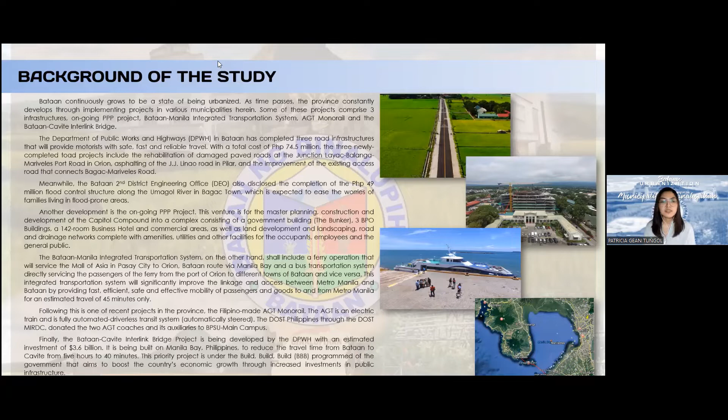For the municipality background, Dinalupihan is a landlocked municipality located in Bataan's coastal province. According to legend, even when Dinalupihan was still a barrio of Hermosa, its residents displayed a fighting spirit that helped them develop their community and defend themselves against alien invaders and local criminals. The area became known as Dinalupigan, or not conquered, because of its fierce fighting spirit. The name Dinalupigan stuck, but by chance, the letter G was mistakenly altered to H during the registration process. Dinalupihan is the name given to the town with a fighting spirit.

Its geographic location is at the northern tip of the Bataan Peninsula, 21 kilometers from Balanga, which is the capital town. It is bounded on the north by Florida Blanca, Pampanga, on the east by Lubao, Pampanga, on the south by Hermosa, Bataan, and on the west by Olongapo City. It is 36 kilometers away from the regional center, San Fernando, Pampanga.

For its households and population, the total number of households is 23,167, and the total population is 106,371, according to the 2015 census of population. This population is distributed across 9,723 hectares of land, resulting in a population density of approximately 11 persons per hectare. 4.59 persons is also the average household size.

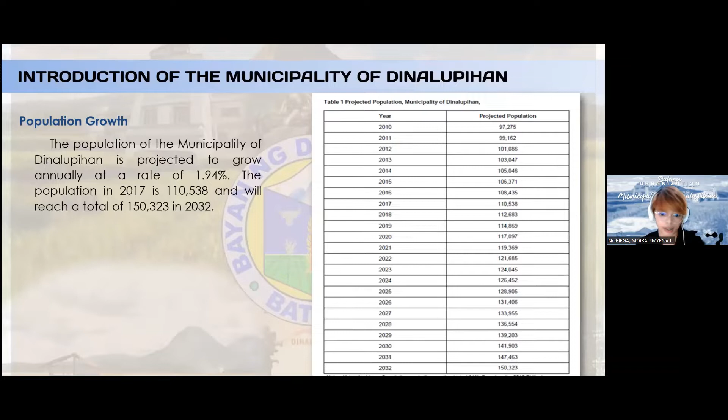The municipality's population is projected to grow annually at a rate of 1.94%, as seen in the table on the right. Population in 2017 is 110,538 and will reach a total of 150,323 in 2032.

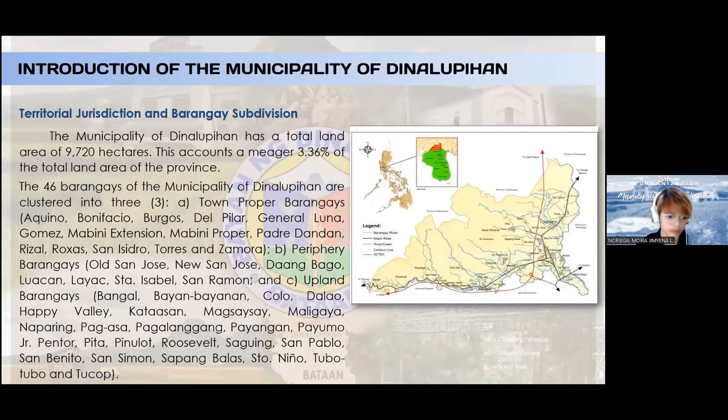For its territorial jurisdiction and barangay subdivision, the municipality of Dinalupihan's total land area is 9,720 hectares, which accounts for 3.36% of the total land area of the province. It also has 46 barangays.

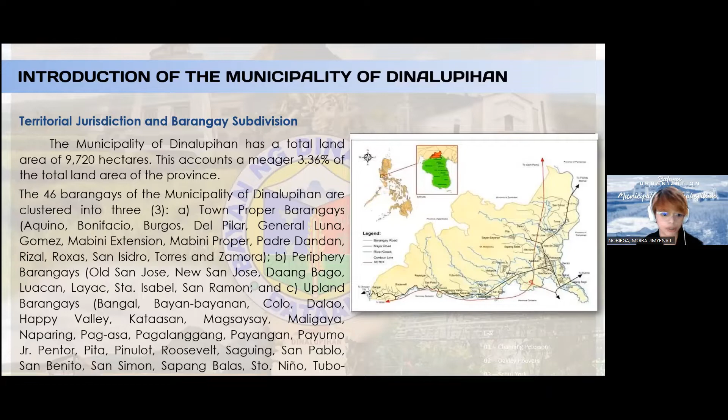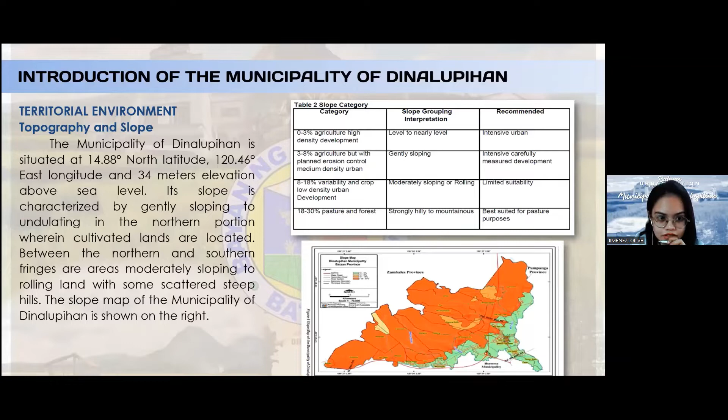For utilities and amenities, Digitel and Bayantel are the major telephone companies servicing the town, while Radio Communications Philippines Incorporated provides telegram and telegraph services. Penelco delivers the electricity, and the Dinalupihan Water District distributes water. Other areas use free-flowing pumps and deep wells. There are 8 banks, 7 schools, 3 hospitals or health facilities, and 4 recreational facilities and a public market in the municipality.

For its major industries, Dinalupihan specializes in the production of sawali and torch, as well as food processing and the creation of tinapa or smoked fish.

Palay, sugarcane, corn, root crops, legumes, and fruits are among the town's agricultural products. Animal husbandry, as well as poultry and animals, is also a major source of income for the residents.

As for its investment opportunities, Dinalupihan, which is emerging as one of the region's potential investment havens, is best suited for agri-industrial enterprises due to its strategic position and abundant agricultural product.

To present the environmental issues in the community, I call on Ms. Denise Lapid.

Environmental issue in the community. There are 11 listed environmental issues in the municipality of Dinalupihan.

First, the presence of hazards, which includes river posing danger during rainy days, occurrence of flooding, susceptibility of the agricultural sector to hazard, presence of residential dwelling along rivers and creeks, as well as private land and over extraction of groundwater.

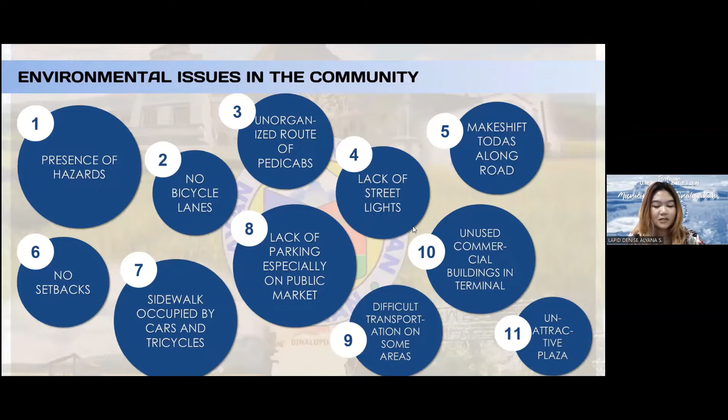To start the proposal, I call on Ms. Patricia Tuñgol. Our proposal on the concept structure plan of the municipality of Dinalupihan is based on its CLUP.

A concept structure plan is an indicative map showing the location and distribution of land uses, existing and new, including designated growth within the boundaries of the planning area.

From the two options, option 2, the dispersed concentration urban form, is the most favored by community stakeholders. It relies on Dinalupihan's inherent assets and encourages expansion into underdeveloped parts of the municipality that are either free of constraints or have a low to moderate risk of flooding and landslides.

The planned urban design best creates the circumstances for achieving Dinalupihan's long-term development vision. This is similar to the roadmap study of sustainable urban development in Metro Cebu.

Red areas are dedicated for work growth centers, blue areas are for play growth centers, and green areas are for green buffer tourism.

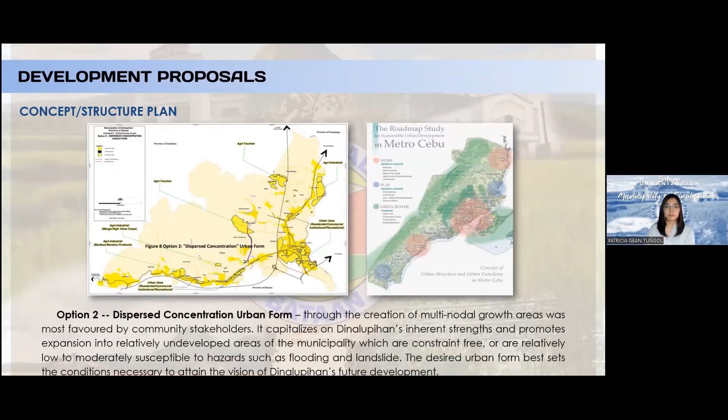Next, our proposal is the road design, which the survey respondents desire to improve. There are 15 elements of road design that we're proposing.

First is the welcome arch. From residents, only barangays have their welcome arch, but not the total community. A welcome arch plays an important role, for it aids people to distinguish the place and gives a welcoming ambience to the public.

The pictures below can be referenced for the proposed welcome arch. Next on the list are the bulb outs. According to Curb Extensions 2019, a curb extension is a traffic calming measure primarily used to extend the sidewalk, reducing the crossing distance and allowing pedestrians about to cross and approaching vehicle drivers to see each other when vehicles parked in the parking lane would otherwise block visibility. Its ideal location is at the corners and mid-block.

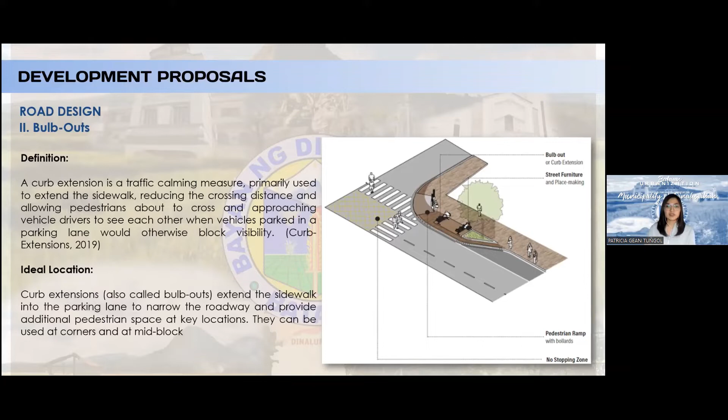Third element is designated parking area. From the survey results, it is revealed that parking is the topmost concern by the respondents. Some vehicles just park in undesignated places because of lack of parking. With this, the road can be designed such that there are spaces for parking.

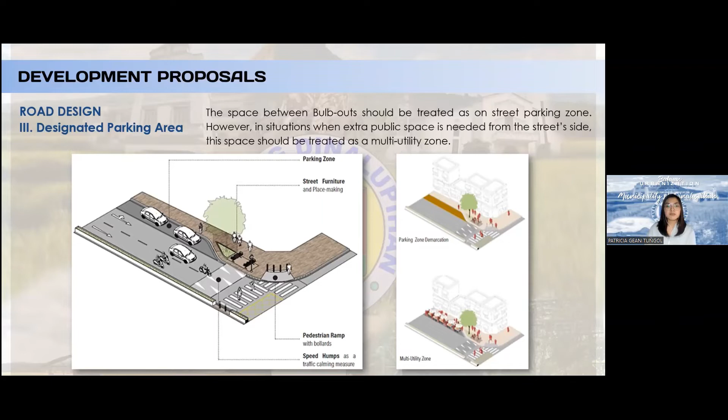The space between bulb-outs should be treated as an on-street parking zone. However, in situations when extra public space is needed from the street side, this space should be treated as a multi-utility zone. Here shows the detail of on-street parking for two-wheelers and four-wheelers, as well as a reference photo.

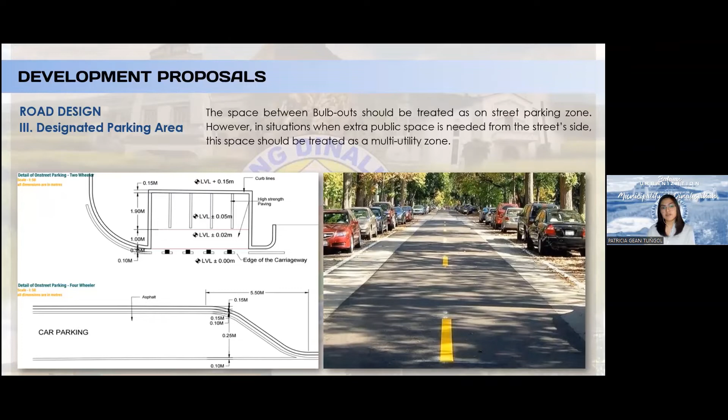Next is the bus stop environment. It constitutes access for the public from the bus shelter to the bus, and the necessary infrastructure required to facilitate the same. There should be a 3.5-meter wide footpath space to be maintained at all bus shelter areas, whereas a 1.8-meter clear unobstructed walking space shall be provided behind the bus stop.

In case the footpath width is insufficient, a simple pole and signage type of bus stop infrastructure can be used. Additionally, the holding area for the bus stop shall be 15 meters and placed on the curbside lane.

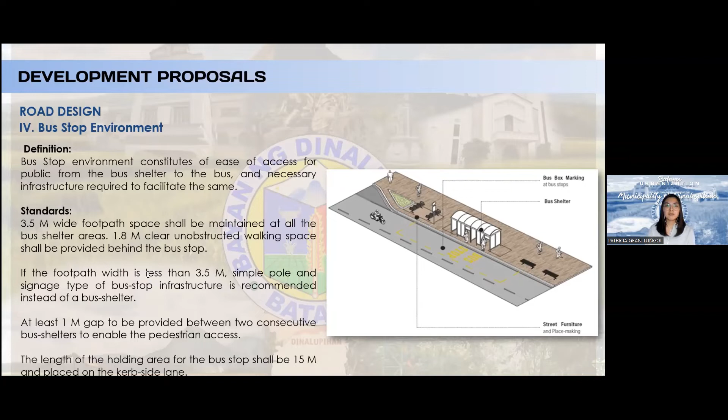Here are some photos to visualize this proposal.

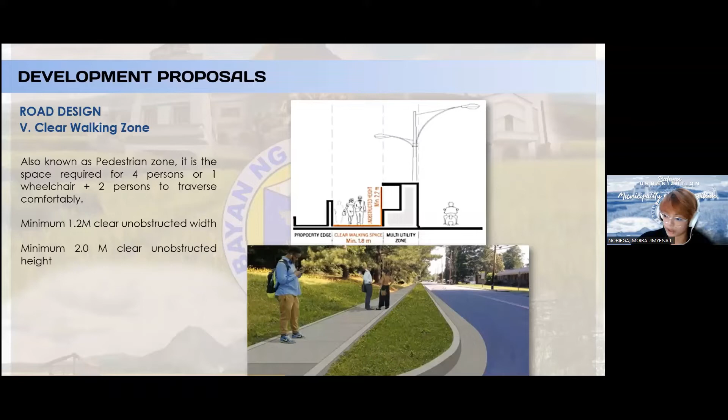The fifth element is the clear walking zone. As mentioned in the problems earlier, sidewalks are being occupied by vehicles which are not supposed to. For this reason, the pedestrian zone or sidewalk must have a space for 4 persons or 1 wheelchair plus 2 persons to traverse comfortably. The National Building Code requires a 1.2 to 1.8 meter clear unobstructed width with a minimum of 2 meter clear height.

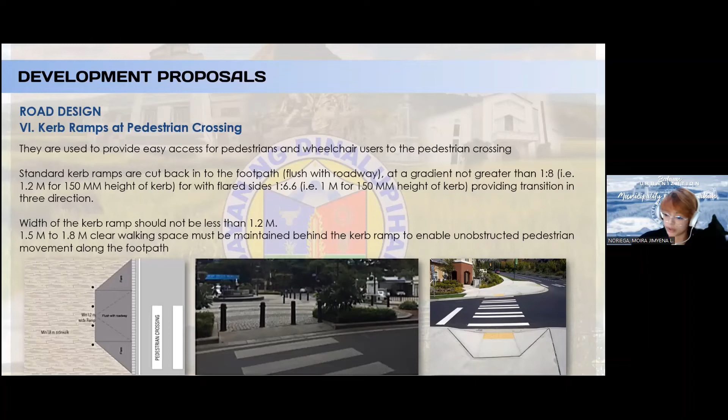Curb ramps at pedestrian crossings are used to ease access for pedestrians and wheelchair users to the pedestrian crossing. This must be observed to ensure that even persons with disabilities can access it. The width of the curb ramps should not be less than 1.2 meters. Here shows the detail of curb ramps which can be adopted by the LGU.

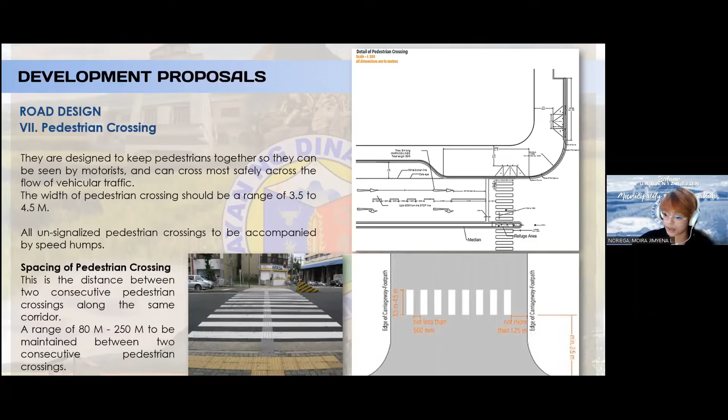Next is the pedestrian crossing. They are designed to keep pedestrians together so they can be seen by motorists and can cross most safely across the flow of vehicular traffic. Within the range of 3.5 to 4.5 meters shall be its width. The spacing between two pedestrian crossings must be within the range of 80 meters to 250 meters. Tactile blocks for PWD shall also be applied.

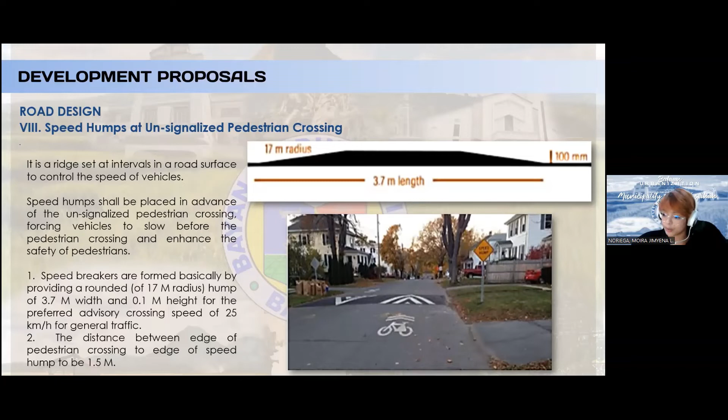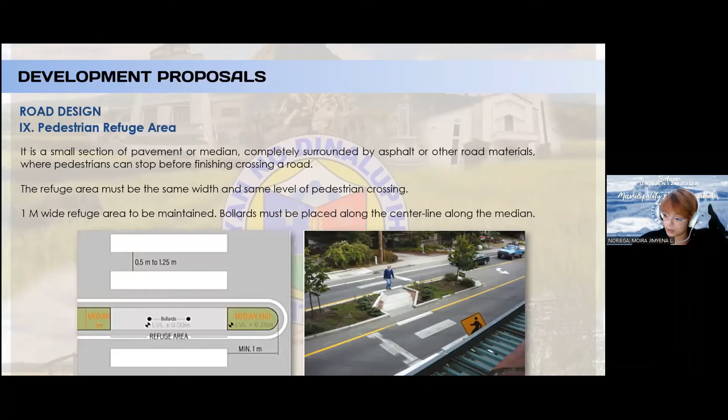Next is the pedestrian refuge area. It is a small section of pavement or median where pedestrians can stop before finishing crossing a road. 1 meter width shall be allocated for this to be maintained. Roads are not only for vehicles but also for pedestrians, that is why space or area for them shall be employed.

The 10th element is the median width. It refers to the width of the portion of divided road separating the travel lanes for traffic in opposite directions. This is important to divide lanes and avoid overtaking on prohibited areas.

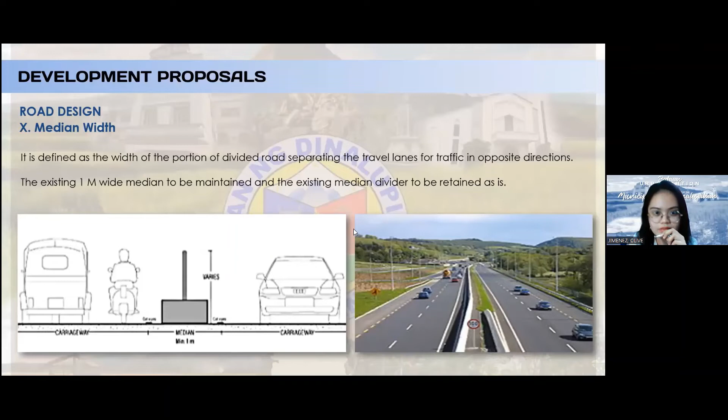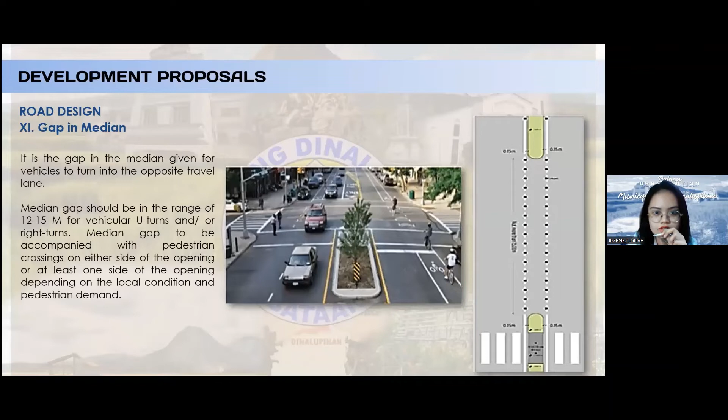Next is the gap in median. It is given for vehicles to turn into the opposite travel lane. It should be in the range of 12 to 15 meters for vehicular U-turns and/or right turns. This element also reduces traffic.

The 12th element is the pedestrian guardrails. To avoid vehicles occupying the sidewalk, this must be added to prevent indiscriminate crossing and spilling over of pedestrians onto the carriageway. It shall be placed on junctions, bus stops, schools, accident-prone areas, and other high-volume generating areas. A minimum of 6 meters length is also recommended.

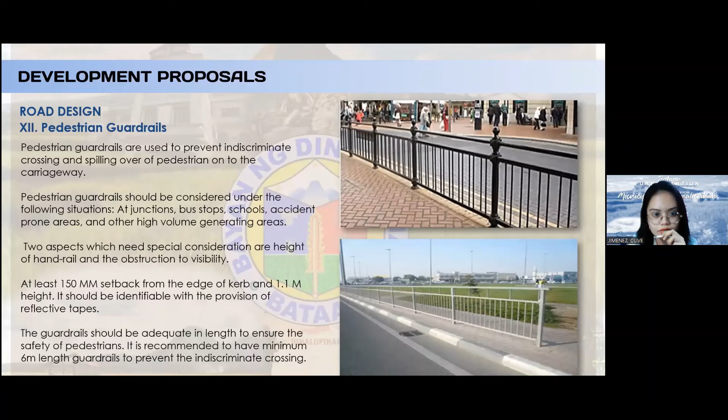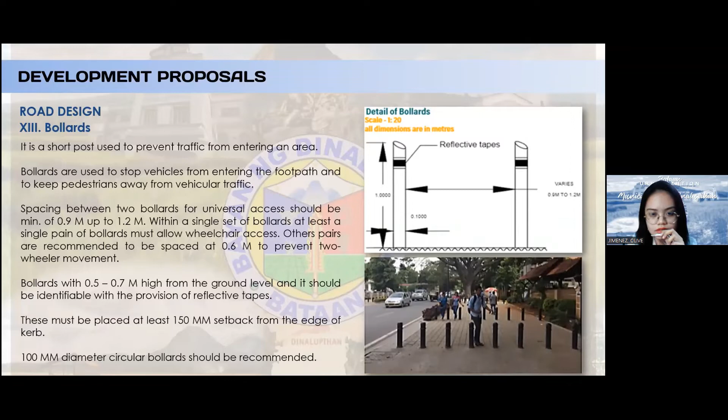Next are the bollards. Bollards are short posts used to prevent traffic from entering an area, stop vehicles from entering the footpath, and to keep pedestrians away from vehicular traffic. 100 millimeter diameter circular bollards should be recommended and placed at least 150 millimeters from the edge of the curb.

Street lights are also demanded by the survey respondents because some areas in Dinalupihan lack these. Street lights help in illuminating the area and provide safety and security to the people, objects, and places that are dark, especially in urban areas. These shall be installed all throughout the roads, especially on highways.

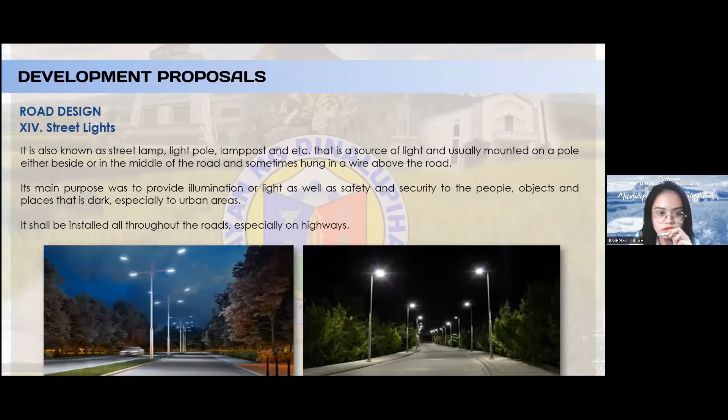The last element is the signages. This helps in identifying proper areas and rules on the road. While there are existing signages on the road, areas where there are no signages such as this are highly recommended to have one. First is the stop sign.

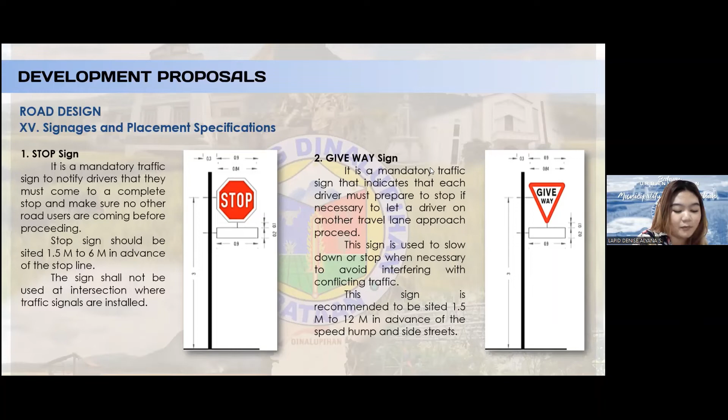That should be sited 1.5 meters to 6 meters in advance to the stop line. This shall not be used at intersections where traffic signals are installed. Second is the give way sign to be sited 1.5 meters to 12 meters in advance of speed humps and side streets.

Third is the no parking sign. It should be erected within 25 meters of the start and the end of prohibition and at the place where parking is truly not allowed.

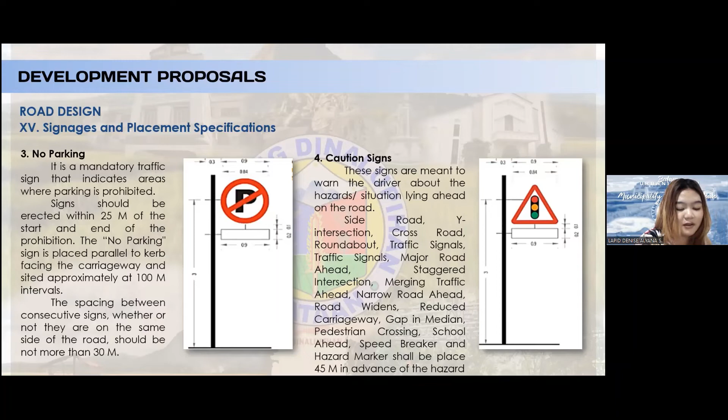Fourth is the caution sign that shall be placed 45 meters in advance of the hazard.

Fifth is the hump ahead sign that should be located 40 meters in advance of the center of the speed breaker.

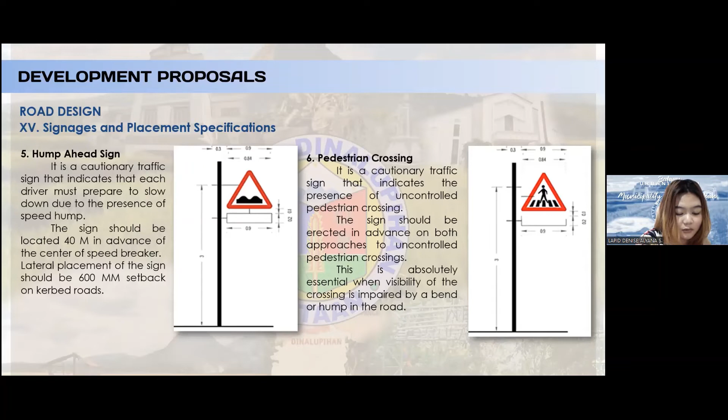Sixth is the pedestrian crossing sign that should be erected in advance on both approaches to an uncontrolled pedestrian crossing. Seventh is the parking sign that should be set up parallel to the axis of the road ahead of the place where parking is authorized.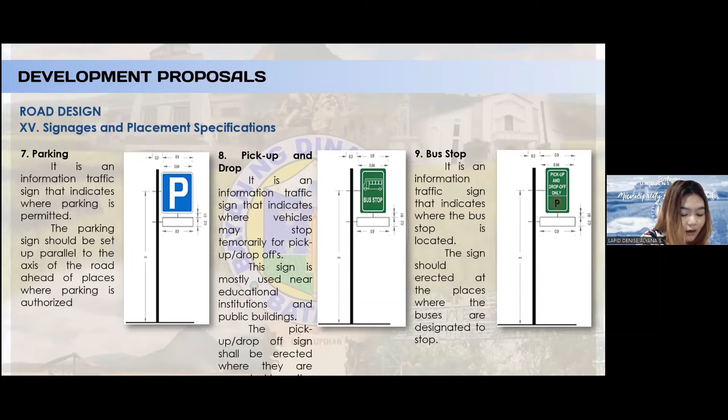Eighth is the pick up and drop sign that should be erected where pedestrians are expected to wait, most used near educational institutions and public buildings. Lastly is the bus stop sign that should be erected at the place where buses are designated to stop.

For the overall redevelopment of General Road, their illustrations are shown below. Combining the aforementioned elements, the general layout of the proposed road is here presented.

From the left, there should be a space to invite street activities such as small kiosks. Seating is also recommended for pedestrians with a lane of trees as buffer. Next to it is the bicycle lane to add more safety and guidance to the public. Energy-efficient lighting and signals must also be added.

After the designated parking area is the carriageway and bus lane. A waiting area or bus stop shelter is then placed next to it. There must also be a connection for walking networks as well as inclusion of wayfinding structures.

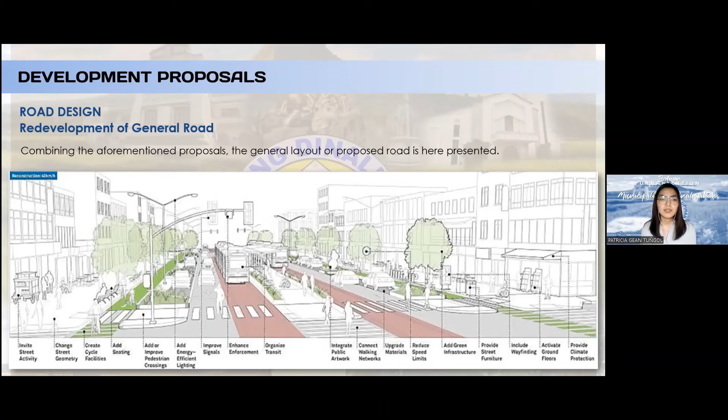The third proposal is the redevelopment of open spaces such as the plaza and food court. As suggested by the respondents, Dinalupihan's plaza should be redeveloped to add more life. This can be greener by adding more trees and plants, more legible by providing the municipality's name, and more relaxing

by inserting pergolas. The first two photos show the Aurora Park in Laoag, Ilocos Norte, Philippines. It is an open plaza similar to that of Dinalupihan's. The ground is finished with permeable pavings rather than concrete all throughout. There are also small gazebos and a fountain as a blue element. This park can be used as a reference for the plaza's renovation.

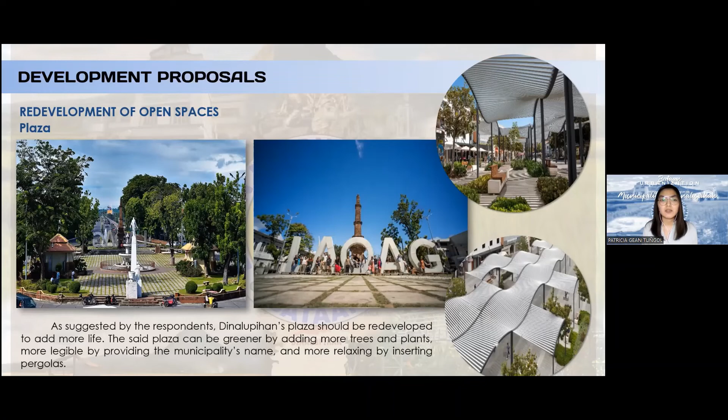Next is the development of the food court. The food court of Dinalupihan is underdeveloped, as said. The allocated space for it can be developed again to further maximize it, helping small business owners and adding revenue to the municipality. It can also encourage people to have quality time with their loved ones and friends by bonding and eating together. These photos are provided to visualize the proposal.

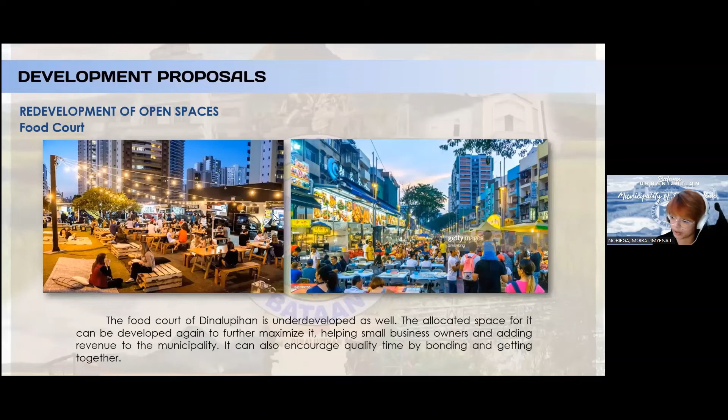Terminals also need development. For the common terminal, Parañaque Integrated Terminal Exchange can be used as reference. It has unique amenities and offerings such as pay lounges with shower rooms for passengers needing to freshen up after a long travel, a comfortable breastfeeding area for mothers, a multi-faith meditation room for all, a gender-neutral bathroom, and leasable spaces.

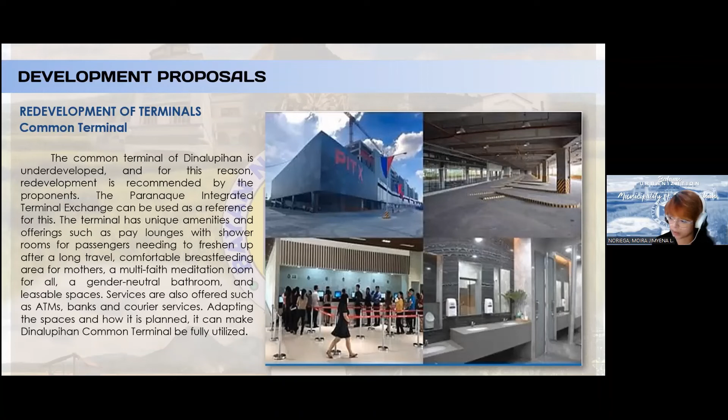Services are also offered, such as ATMs, banks, and courier services, adapting the spaces and how it is planned. It can make Dinalupihan Common Terminal fully utilized.

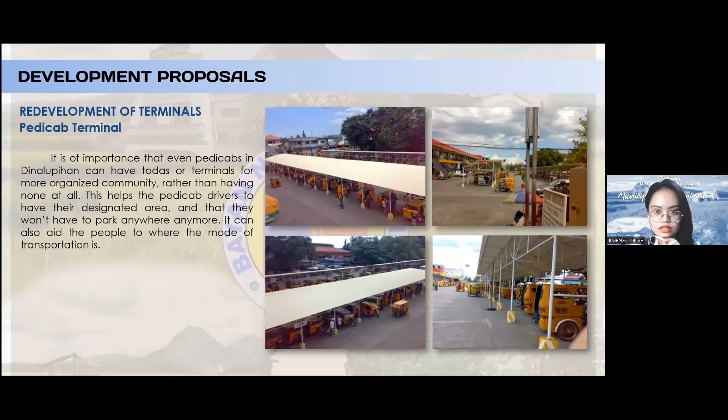Pedicab terminals are recommended to be built as well in order to be more organized. This proposal helps the pedicab drivers have their designated area so they won't have to park anywhere anymore. It can also aid people in finding where the mode of transportation is. It shall be constructed at proper locations so as not to block the carriageway.

To come up with a common ground for Bataan's municipal hall design, it is proposed that Dinalupihan's municipal hall exterior design be renovated to complement that of other municipalities. Moreover, a welcoming ambience can be reflected, and the dignity of the government can best be portrayed through this solution.

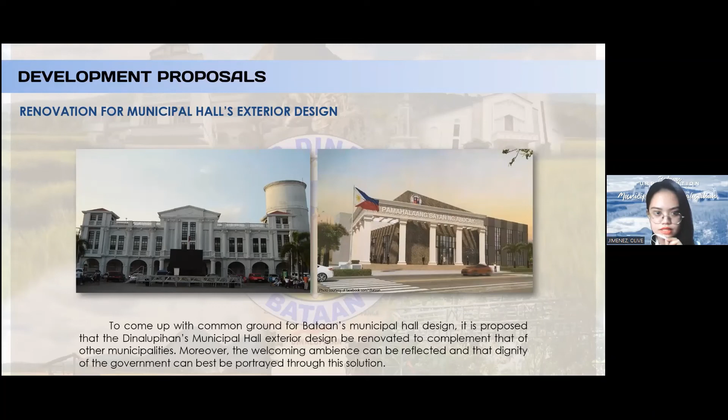Another proposal of our group is the community garden. It can be created on private or public land where citizens can grow fruits, herbs, flowers, and mainly vegetables. This can benefit them by spending less on their food and resorting to

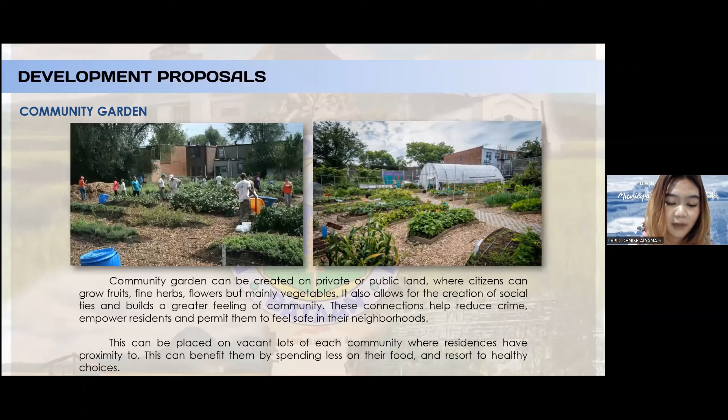healthy choices. Social ties and belongingness can be generated, and this helps in reducing crime, empowering residents, and allowing them to feel safe in their neighborhood.

To address overflowing water in rivers, protective barriers are proposed as well. River embankment defenses are regularly upheld by artificial revetments. Several cost-effective geosynthetic options exist that frame riverbanks, curtail erosion, and protect riverside and adjacent structures from the destructive flow velocity apparent in rivers during storms and floods.

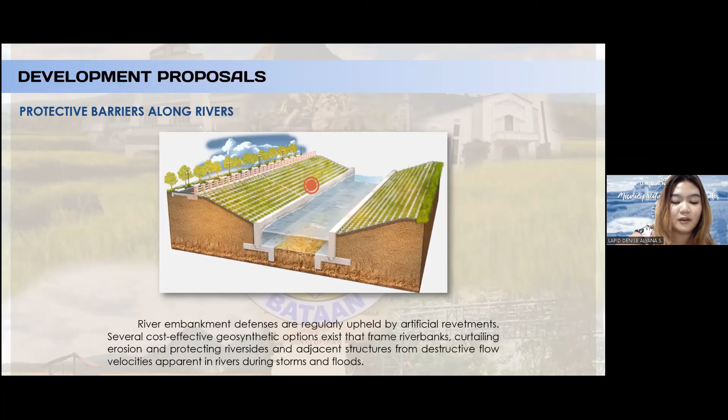For the last part, our conclusion and recommendation. With these proposals, where fundamentals of urban design and community architecture are applied, the proponents aim to make it into reality, as this can aid in improving the municipality and consequently its people's way of living.

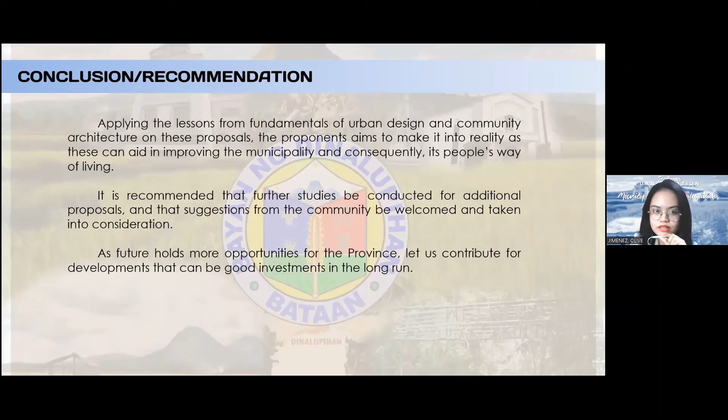It is recommended that further studies be conducted for additional proposals, and that suggestions from the community be welcomed and taken into consideration, as the future holds more opportunities for the province. Let us contribute to developments that can be good investments in the long run. This ends our presentation. Thank you very much.